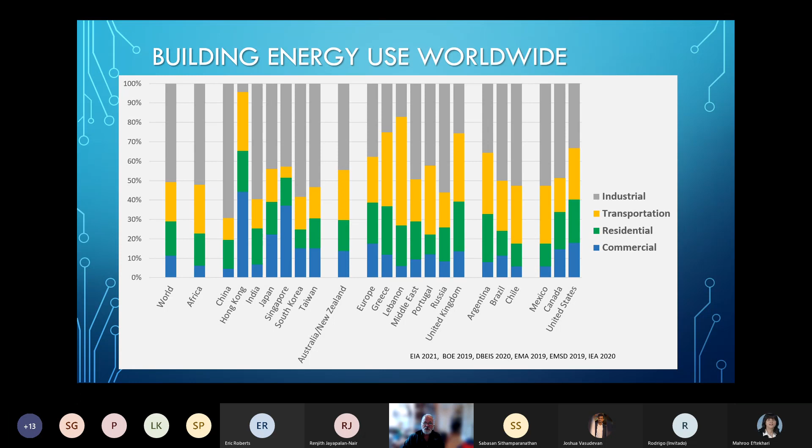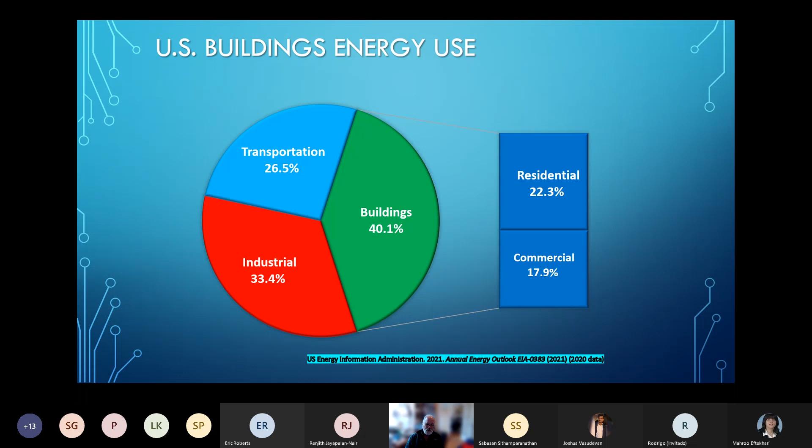If you go to the center, the last bar in the center where Europe is, the UK, it's about 40%. It's actually very similar to the US in terms of energy use. Transportation's a bit higher in the UK, with about 25% left in industrial. But I'm going to focus my next couple slides on the US because I have good data about end uses. I try to present that where I can. So for the US, we're at 40%, a little more than half in our residences. Up till about 10 years ago, it looked like the commercial sector, the non-residential sector, was going to overtake and be the strongest sector, but it really hasn't recovered from the economic downturn of a decade, 12 years ago.

Oops, sorry. But if we look at residential, and this is really kind of the important part of it, we have to look at it as a whole. Our residences, we used to think of them as primarily energy used for heating, water heating, probably less so cooling in the UK, but then our appliances and maybe even the computers and some of the other things going on. But if you look at the bottom bar, at least in the US, we're seeing that a full quarter of energy uses are small energy uses. These are things like the cell phones and all the devices that are connected.

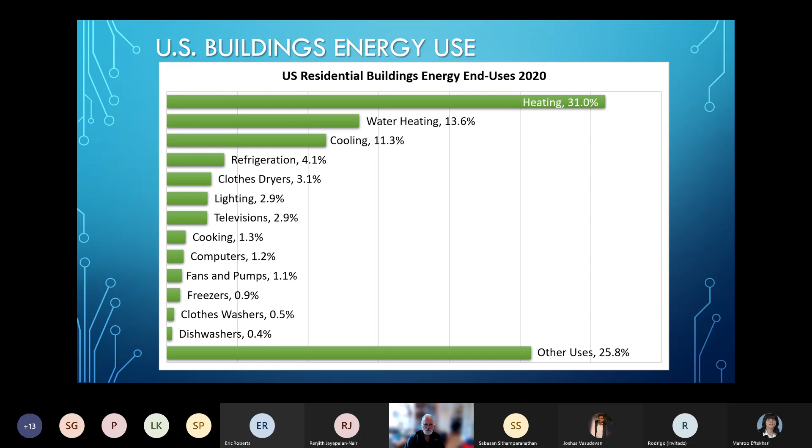In my own house, I have 22-year-old twins, which are away at university right now. But when they're home, we can see 19 or 20 devices connected to the Wi-Fi system. So they're small pieces, but they're also very important. And they add up to be quite a lot of energy use. So we have to not just worry about the main parts there, the heating sector or some of the appliances and other things. We have to worry about all of it in total. And similarly, in the commercial sector, there is really not a single building type. This is averaged across all the building sector.

Apologies, I've got allergies already.

So for example, if we had a grocery store or supermarket, refrigeration would be probably 50% of the energy use, and cooling and lighting secondary results there. If it's an office building, probably a combination of heating, cooling, lighting, ventilation, and equipment. And so we need to look at the combination of all of those pieces.

And again, other uses, this is beginning to include things like all our interior transportation, our lifts, escalators, moving sidewalks, all the other things in addition to that that you're not seeing there. They're small uses. We have to cover the whole sector and look at all the uses if we're going to really make inroads into improving the efficiency.

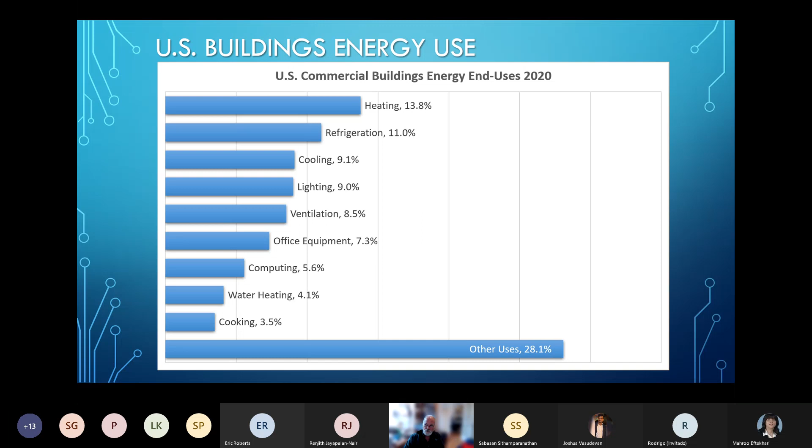In the US, ASHRAE standards work in the energy area began 35 years ago, or actually 55 years ago, sorry. 45, I'll get the number right here in a second. 1975, ASHRAE published the first energy efficiency standard for buildings, 90-75, and had progressively been improving that. And you see the latest version of that published in 2019. There'll be a new version this year as well.

They update every 3 years, but the changes in the percentage of drop for that have been slowly getting down to where they're a few percent, maybe 6 or 7. And I think the preliminary number shown there for 2019 actually decreased to about 3.5% reduction. But at this point, our buildings are already using 70% less energy than would have been allowed under the standards of the previous century.

The green building standard from ASHRAE 189 has already been working as well. They tend to be a bit ahead of 90.1, partly because they're based on 90.1, and then they are updated kind of out of sequence. So they're a bit more, so that we're seeing down in the 75% or more range.

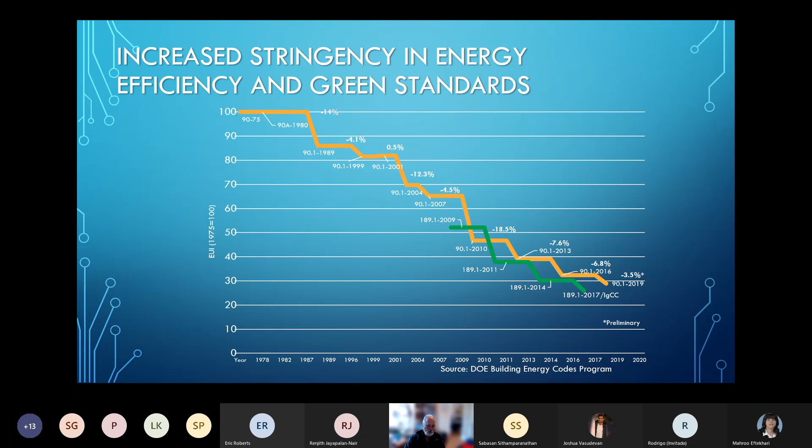And so that's continuing to get there, but also we're all seeing a point at which there's not much else that can be done from a code standpoint to reduce the energy use in buildings. It's got to be an integrated approach, not just a prescriptive.

So let's talk a little bit about modeling and simulation. And for many of you, this is not going to be new. I'm just trying to lay the groundwork here. So a definition from the dictionary: a model is a schematic description of a system and can be used for further study. So when we're talking about modeling in an energy situation, that's what we're doing. It is a derived description of what's going on there for further use.

If we're doing simulation, that's specifically mathematical, so that you're creating that model and then using the variables to determine the effects on other variables. So we create a model of a building, and we're going to simulate how it reacts to changes in environment or changes in technology, or maybe some of the building systems related to it.

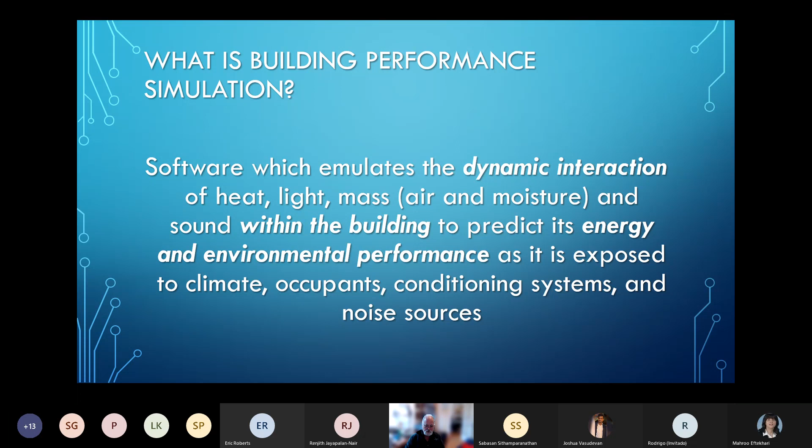So what do we mean by building simulation? Specifically, we're talking about software, and we're talking about dynamic interaction of heat, light, mass, and sound within a building. And we're trying to predict what's going on with its energy and environmental performance, as it relates to changes in climate, occupants, systems, and even now noise sources, because we're not talking strictly about the building energy here. It does go beyond that.

So building performance simulation, in my opinion, is still much more art than science. The science is pretty well established in terms of the simulation tools themselves. The art is in understanding and knowing what the information is that you need to be presenting, what information is important, what the level of detail is, and how that should be put together. And what do you do when you don't have the information? So that's really kind of the art part of it.

Issues related to maintaining the building in a model, the data throughout the life cycle. We need to be training users to think about simulation methods and different ways of attacking a problem, not the tools themselves. Yes, you need to understand how tools are, but I think we spend too much time worrying about particular tools and how we can trick those tools or do a workaround. And that's not a useful way of looking at it. There are other more accurate ways of trying to do that.

And anytime you try to trick a tool, you're depending on your understanding of what goes on in the tool to know whether it's going to work or not. And that's kind of risky. Our tools also tend to get behind. New technologies come, and it's difficult in many tools to be able to model those quickly unless the developers are staying up to date. And if we can't simulate a technology or system, it becomes a real challenge.

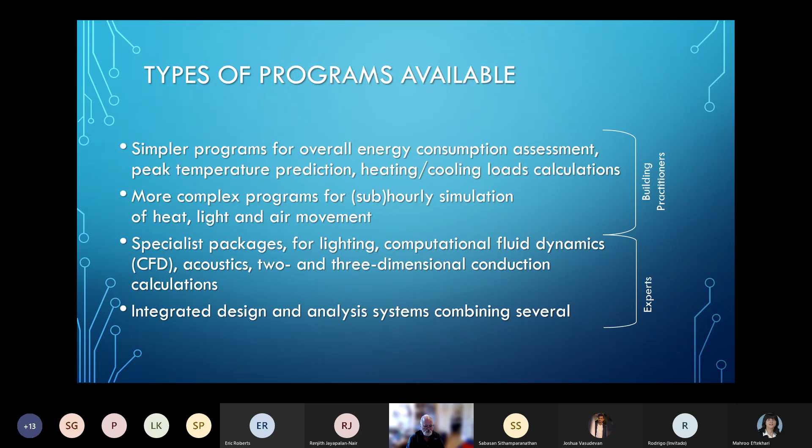So why do we bother using simulation? Well, it allows us to make decisions, to understand the impacts of actions we may take throughout design into construction and even into operation. It also lets us say, if we do a simulation and find that heating is the biggest issue, then we can focus there first and focus the efforts where they make the most effective use of resources. It allows us to look at alternatives throughout the building design process, even into construction, operation and retrofit. So is this window better than that window, or should I insulate?

But what about efficiency of heating and cooling equipment? Where can I make changes there? Simulation also allows you to do prediction of performance against benchmarks or project goals. So you want to set a goal to get to 50% below the energy standards, and you need to be looking at that early to attack the opportunities for that, and be able to challenge

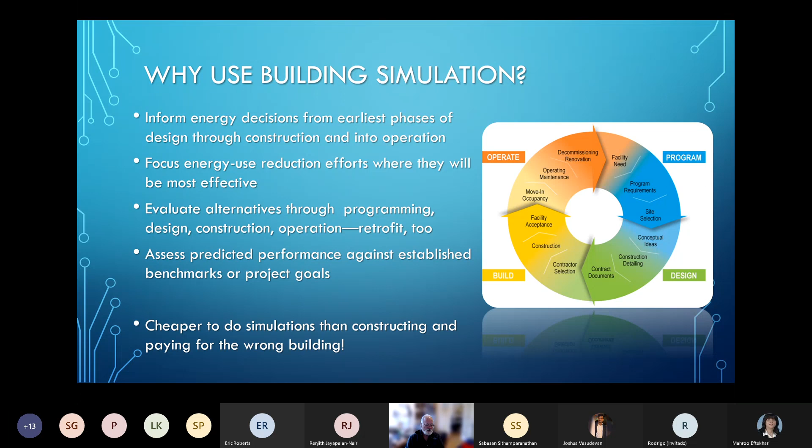things that are not helping you get there. And frankly, it's cheaper than constructing the wrong building. It's cheaper to do simulations than constructing and paying for the wrong building. That energy impact may be for 30, 40, 50 years. So you need to recognize that 1 year or less of cost to do an energy simulation is going to pay back many times over throughout its life.

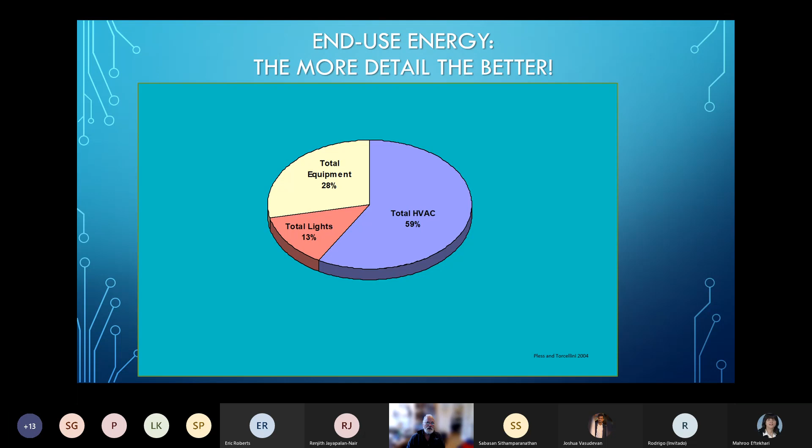So this is an example from a building I worked on when I was at Department of Energy. This was an early attempt at doing a very low energy building. They didn't get to zero initially, they have since. But this typical pie chart: HVAC at 59%, lights at 13 - oh, that looks pretty good - and then internal equipment at 28. But I need to look at the details of that. I need to understand what's going on.

So if we start from the top right with the electric boiler - they designed heat pumps. Why is the electric boiler taking almost 25% of the energy? What they found was that the sequence was backwards of what it should have been, that the heat pump should come on and the electric boiler was only supposed to come on when the heat pumps could not meet the load. This led to them not meeting their energy cost savings goals, because the electric rate was set by the highest peak in any of the previous 11 months. So that was a real problem. It could have saved them a lot more money.

Also, wastewater treatment - unusual building, it has its own living system, basically plants and other biologicals helping to clean the wastewater as it comes out of the building. The wastewater is cleaner, but it has a 10% impact here. And although we don't really think about it in many of our buildings because we don't treat our own wastewater, we don't count the pumping to get water into our buildings - it's about 10% of the energy use of most buildings at the municipal level. So it's still a large amount of energy going on. So water efficiency is also important.

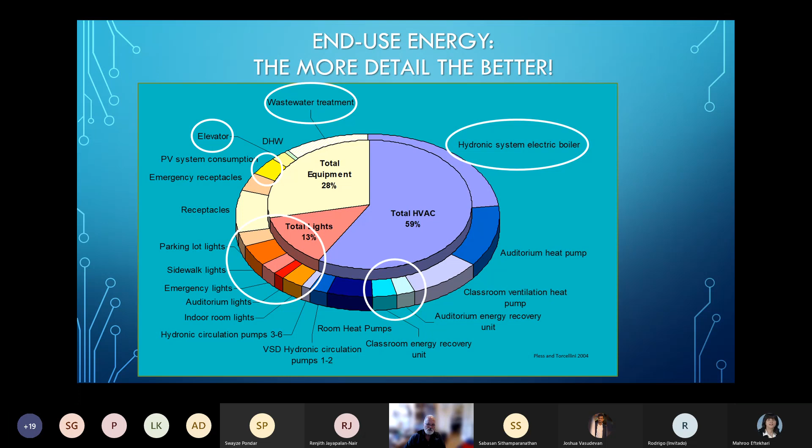So we need to look at the detail. The more we understand about how energy is used, the more we can find ways to cut this even further. And this is that building I was just talking about with the pie chart. So throughout this, finding that simulation is kind of a critical tool

to support building design and operation. It helps you make those decisions we've been talking about and selecting the best combinations. But simulations are just that - real buildings will use more energy, they'll produce less power if there's PV. Controls don't work as they do in simulations. They're ideal in simulation, and that's not how they work in reality.

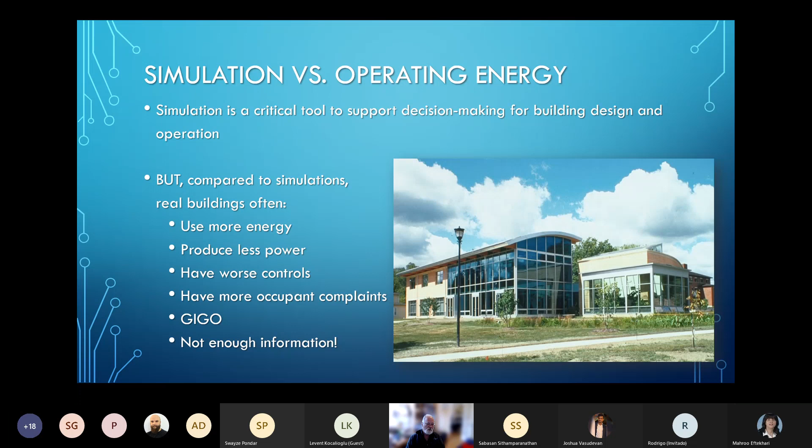Occupants can't complain very loudly if you're in a simulation. Just a few hours uncomfortable doesn't say anything, but a real person will. And it comes down to garbage in, garbage out. The less we know about how the building's operated, the less likely we're going to be able to predict it.

This is a great quote, not specifically about building performance, but from Stewart Brand, who has a great book. This is from 20 years ago, How Buildings Learn and What Happens After They're Built. And what I love is his quote that every building is a forecast, and every forecast is wrong. And he's right. What we're forecasting their use is just not going to happen.

And the best example of that is on the cover of the book. These are two buildings built in New Orleans in 1857. So kind of traditional, what would have been Federalist style here in the US at that time. Pretty simple, and they're effectively twins. But here's what they look like 150 years later.

You can't even hardly tell that they're the same building. The one on the left's got some of the New Orleans wrought iron added. The one on the right's got more traditional balcony and other aspects added to it. So it is a very different sort of look.

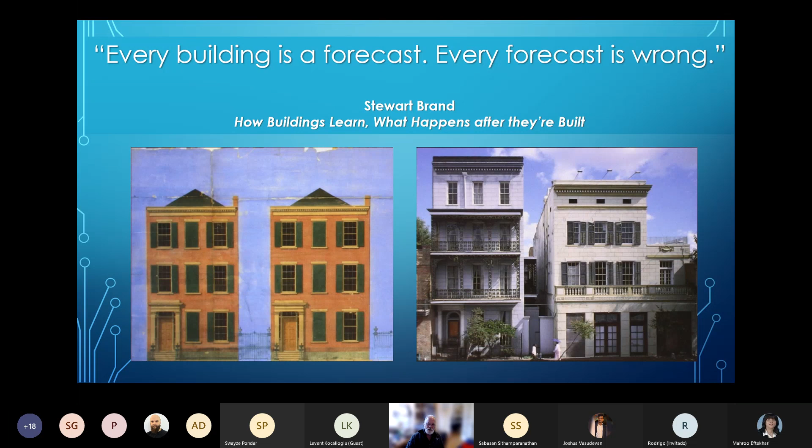And our buildings start evolving immediately when we start using them, because they don't quite meet what we need, and they're not what we're doing. So our prediction is not going to be what happens in reality.

So let's talk about what's inside the black box. The ASHRAE 2021 Fundamentals Handbook is probably the best source of good information about that. Chapter 19 has information about all the energy estimating and modeling methods. Some of my presentations derive from that, but also from other things as well.

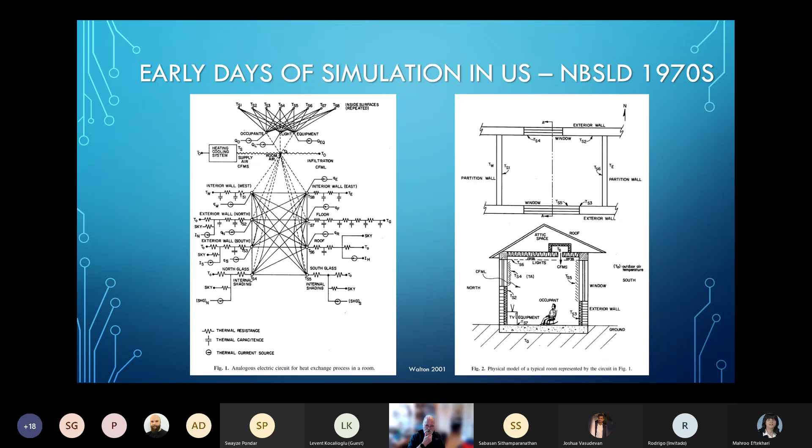Early days of simulation, there was a program, a heat balance program, NBSLD for National Bureau of Standards loads, and they were almost treating the interconnections of heat flows like an electrical circuit. So you'd have resistance through insulation, etc., and so they were being able to do that there. This is from a summary that the author of that created 20 years ago, George Walton.

There's a history that's also been done in several papers, many of the foundational algorithms from the 20s through the 1950s, and then beginning to use computers in the 60s. ASHRAE started with a task group on energy resources, which are really looking at how the calculation methods are.

1971, the U.S. Postal Service or Post Office created a simulation program using some of that information, but they went down a path of what's called weighting factors, and we'll talk a little bit more about that. That path led on to a program from NASA. NASA had an energy program. Also, then that was then repackaged for California and ERDA, and ERDA was a predecessor to the Department of Energy. And that is the series that then became DOE2.

The other method, the National Bureau of Standards I just talked about, the NBSLD, that led to a series of other programs that were focused more on a heat balance method rather than weighting factors. And we'll talk a little bit more about some of those changes.

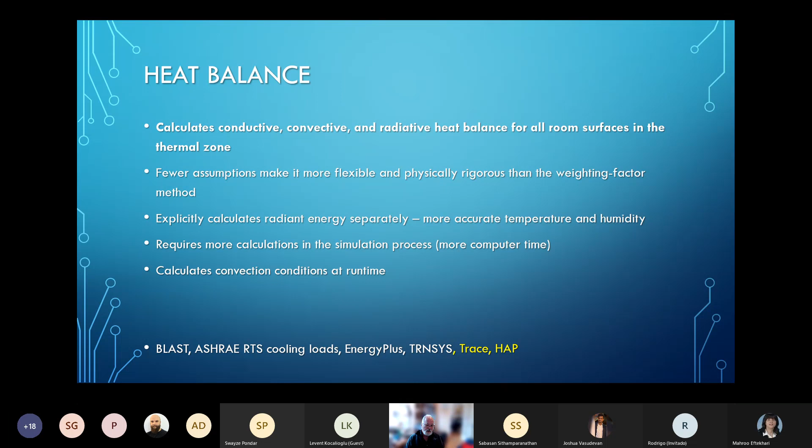The other thing is the convective coefficients can be calculated at runtime rather than pre-calculated, which makes airflows around surfaces more accurate as well. So we've got BLAST, the ASHRAE radiant time series cooling loads, EnergyPlus, TRNSYS, and now TRACE 3D, and HAP has a new program underway as well.

Thermal network, explicit network really, you have to have a matrix to describe all the heat and energy flows. So you are explicitly describing what's going on. There are no assumptions. It's flexible, physically rigorous, but it requires much more explicit input describing exactly what you're trying to do. It can require more calculations because there are iterations that have to happen, but it's often a good trade-off if you're trying to be very accurate. So ESP-r and IDA-ICE are two examples of that.

Other differences, if you look at the DOE-2 family versus the EnergyPlus family, they're kind of separate. In DOE-2.1e, for example, you would calculate all the loads for the entire year, the 8760 hours. They would then get passed to a system analysis, which would pass the system loads onto the plant. There was no feedback, and that led to loads not met, if you're familiar with that in either DOE-2 or EQuest. EQuest did a bit more merger of that with the loads and analysis—there was some feedback, but there's still some sort of limit on that as well.

In EnergyPlus, there's feedback at the time step, which means where loads can't be met at the system or plant level, you will see those reflected in rising temperatures if you're cooling, or humidity changes, or other things directly within the simulation.

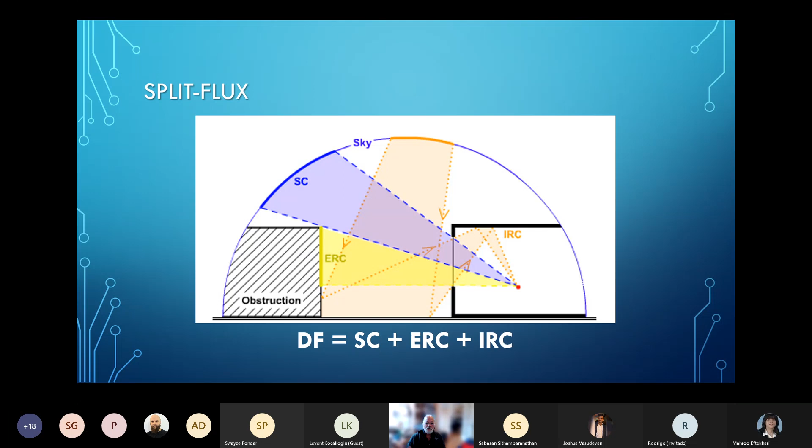So you've got the sky component, the externally reflected, and the internally reflected, and those together are what you see at a single point.

Radiosity calculates radiation transfer among surfaces. Now we're talking about light transfer. It's very similar to a heat balance, and it's accurate for most configurations and structures. You can combine it with Split Flux to increase the accuracy of those calculations.

It'll create view-based images, but they're not photorealistic. They're pretty flat looking, as we'll see. It also does not account for light contributions from transparent, translucent, or specular surfaces. So DLux, DElight—there's a version of that in Energy Plus, and also AGI 32.

That's what a radiosity image looks like. You can see the shadows, and it looks pretty accurate, but it's not photorealistic. It's a pretty flat image in terms of that—there's no spark to it because it can't do the specular reflection we'll talk about next.

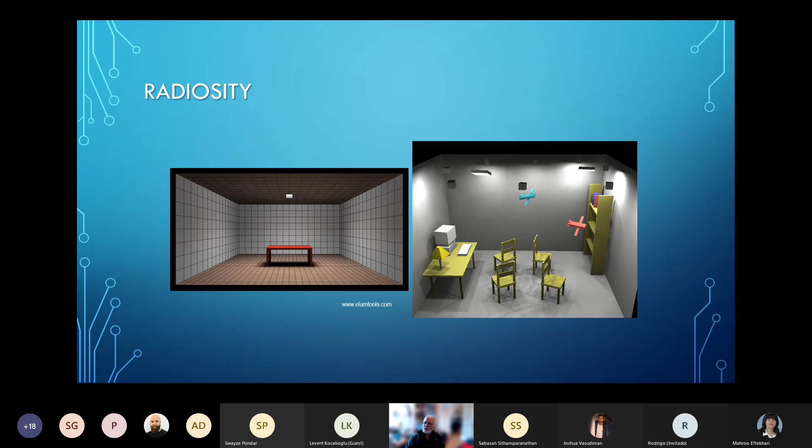Ray tracing is the most accurate, point-specific lighting calculation you can do. It follows a given reflection of rays outward to light sources in the scene, basically tracing where the light or reflections are coming from. It's very accurate, you can put pretty complex systems together, and it creates very photorealistic images—I've got a couple examples. But it can be slow depending on what you're trying to do.

I know ESP-r has implemented a version of this, and Energy Plus in some of the tools now can do that as well. So Radiance, which is a public domain program—Spot, DaySim, Diva—most of them all derive from Radiance as an engine, but provide useful interfaces.

Ray tracing—just take a quick look here. There's a camera, and it creates an image based on where the rays are coming from around that particular object.

These are radiance images, produced with simulation based on inputs, so you can have a lot of accuracy, and it can feel more like some of the renderings you see out of the BIM tools today. But in this case, it's photorealistic and photometrically realistic, which is useful.

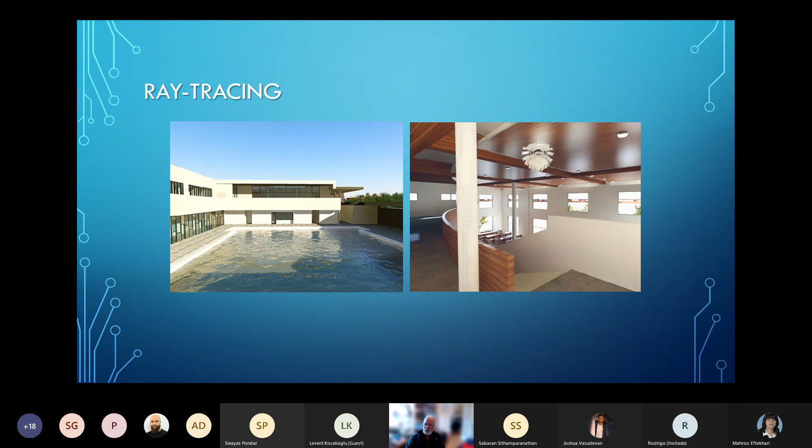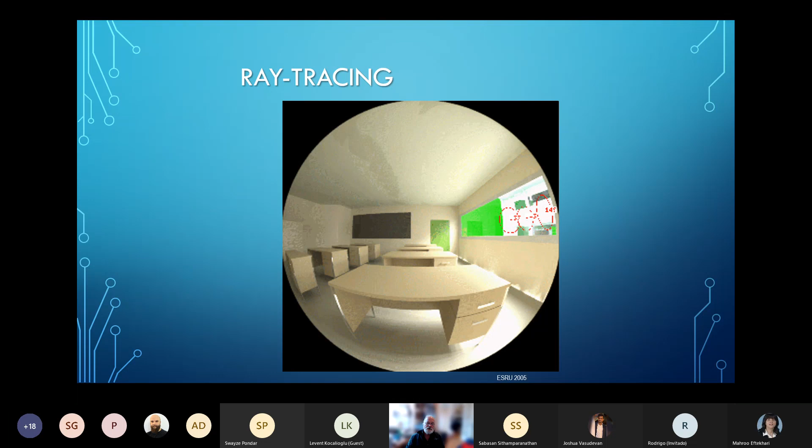This is from ESP-r, being able to actually measure light levels coming into a space, seeing glare problems. They use a fisheye view to look at a whole room, seeing how changes to different technologies can help improve that glare problem.

So many tools—where do we start? Well, the ASHRAE handbook is actually a pretty good starting point. It does not talk about tools specifically—that's not ASHRAE's thing—but it's good if you're trying to understand the basics of the methods. I haven't covered some of the statistical methods and deep learning and AI-based things, but it does cover those as well.

There's also a book that came out of IBPSA, Building Performance Simulation for Design and Operation, updated just a couple of years ago, that has chapters on a wide range of things. There was also a report that we did about 15 years ago that had 20 different programs and tried to, in a very quick brush view, look at what the combinations of capabilities were across the various tools. 20 different tools were covered there.

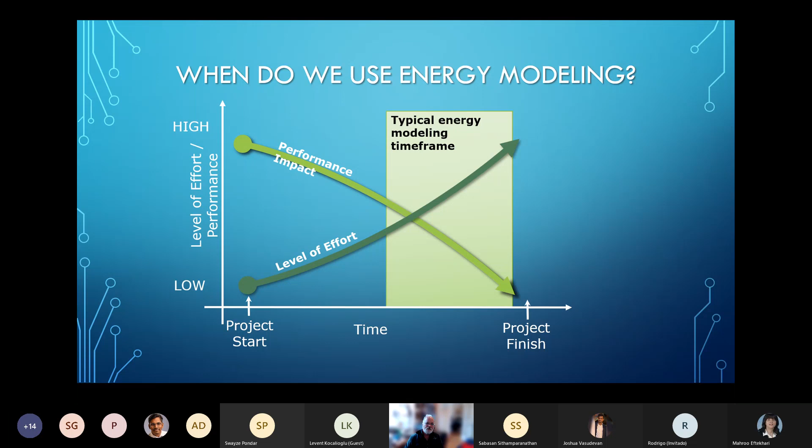So what the standard does is put a series of simulation cases together, minimum requirements for doing that, and then describes that. It's not required for all buildings, although it is cited in 90.1 and 189 at this point. It's about using simulation during design. It's focused on people that are trying to either contract for or are interested in using different simulation methods.

So the compliance is pretty simple. You have to do a climate and site analysis. You have to do benchmarking: what do other buildings of this building type in this location use in terms of energy? There needs to be a charrette focused on setting goals, and those goals need to be part of the owner's program or requirements. Then there's some general modeling cycle requirements, and you have to do one set of models, and that's all it takes to comply at this point.

There are different levels, and we're looking at it saying, if you're trying to do more detail, what those involve. But there are also these different cycles: simple box, conceptual, HVAC, design refinement, integration, or value engineering. And that's one of those things you have to do.

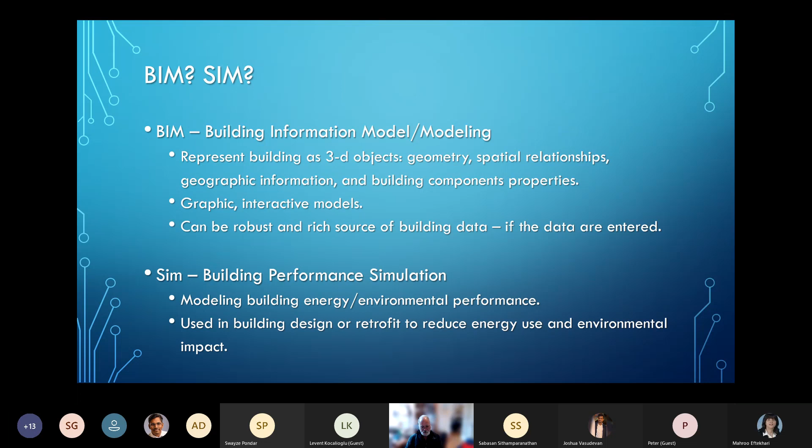So what about creating a simulation model from BIM? I said earlier it was kind of difficult. BIM, we all know what BIM is, trying to represent a 3D representation including geometry and spatial relationships and how things fit together, as well as their components. Often very graphical, interactive. And then SIM, we've been talking about, is really looking at how do we take the information, the geometry and all that other part, and use it to get the building performance.

So from the modeling standpoint, the model and the modeling are kind of involved, but using the software to really look at the attributes of the building and how it goes together. And BIM is widely used at this point. I don't think it's widely well used, but I think that's a work in progress today. So the idea is to be able to have and share that information.

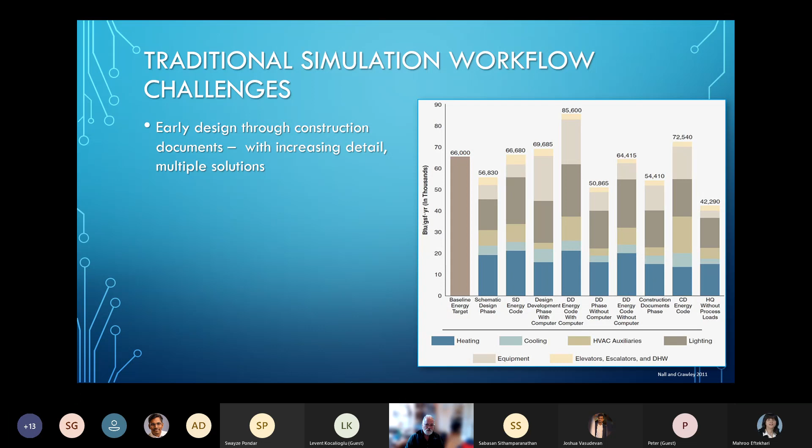So here's an example of a project I worked on many years ago. This is a corporate headquarters, and you see the bars are changing. And that's partly because information was changing. So working on this project, we started in early design before there was even an initial design, through construction documents. With increasing details, we had to go back and revisit. We often had to throw the models out.

And then we get on to construction documents. Now we have fully developed things. We have a cafeteria, we have an auditorium, other things, and the atrium is now quite a central part of the building. But at the same time, if you look at my chart, it's showing the energy code and then the design development energy code with the computer and without the computer, showing the various components there. And fortunately, because we were monitoring throughout design, we were still able to do it. But essentially, I had to reconstruct the geometry for this project every time we were dealing with it.

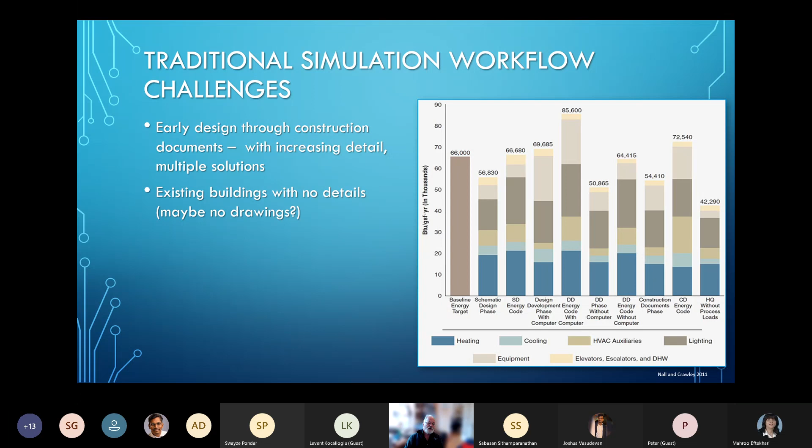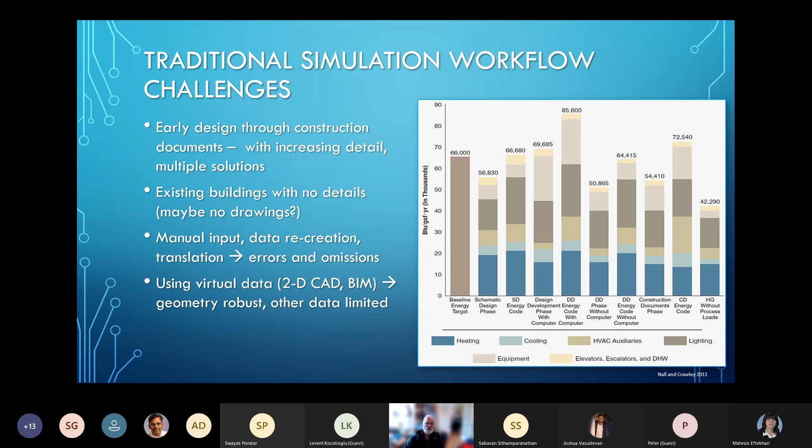If it's an existing building, how are you going to put that together? No details, probably no drawings. So anytime you have to do manual input, you're going to have errors and omissions. If you've got the virtual data, and I personally prefer 2D CAD or even just floor plans to BIM at this point, because I spent so much time cleaning up the BIM model. You probably have very robust geometry, but you may not have thermal-physical properties. They may be there, there may be space for them in the BIM, but I don't see them very often.

So a 2D workflow might have a drawing, and we have to create that in there, create an energy model and do analysis results. That's pretty good to work from. It's often not as fast as some others.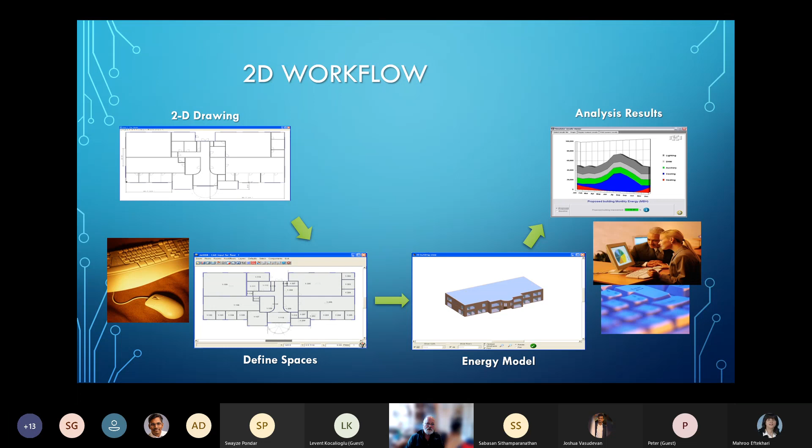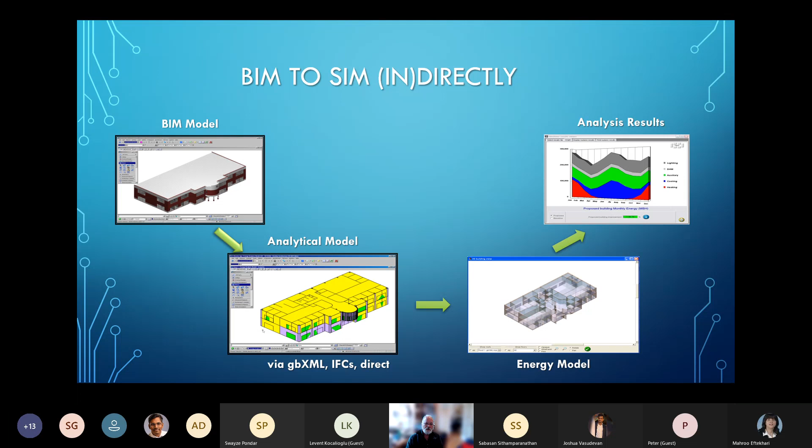What if we could take the BIM model through an analytical model, and there are various methods of getting there, and then on to energy. If that's more seamless, that is going to speed up the process quite significantly. The analytical model solves some of the issues of the BIM, makes sure spaces are enclosed. A lot of BIM models don't have floors in them, which I find interesting, but also just creating all the spaces, getting them closed and making sure the boundaries are there.

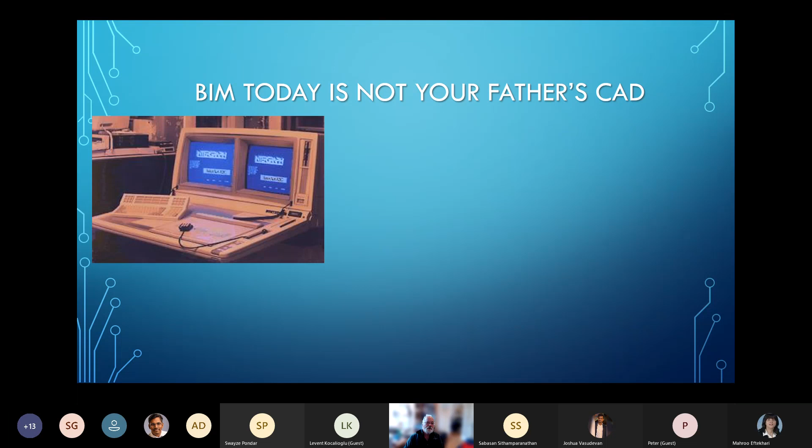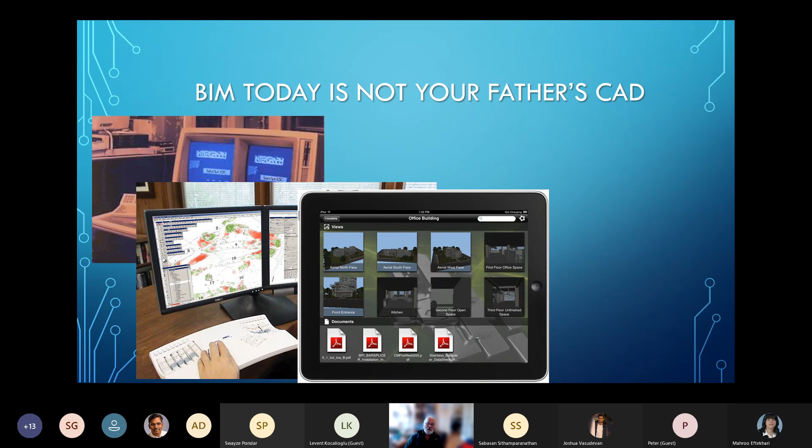But it doesn't have to stay in the office. It can now be on our tablets, being able to take various views and look at that in the field, even to see what should be, for example, up in the ceiling, and being able to compare that in the field.

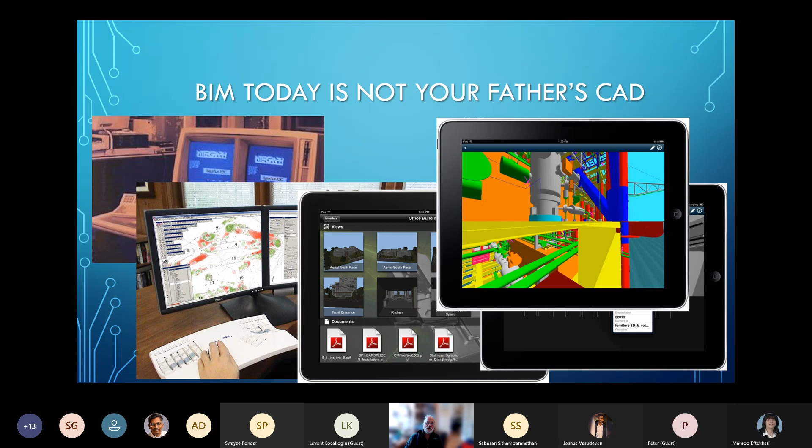So BIM to Sim: buildingSMART has been in this for a while with the Industry Foundation Classes. Most BIM software will do at least geometry. Some of them will take it further. It's been around for 20 years, still pretty complex to deal with, but it is limited in what they can do. gbXML, another independent format, is focused more on the energy side of things rather than the BIM side, being able to translate.

Autodesk bought a product called Green Building Studio. Most of that has been pulled into their products, particularly Revit today. But then Autodesk, Bentley, and Graphisoft all have built-in simulation capabilities now. At least on the conceptual level, you can begin to look at that. And I really still believe interoperability is key to getting this done. It's just very difficult to do.

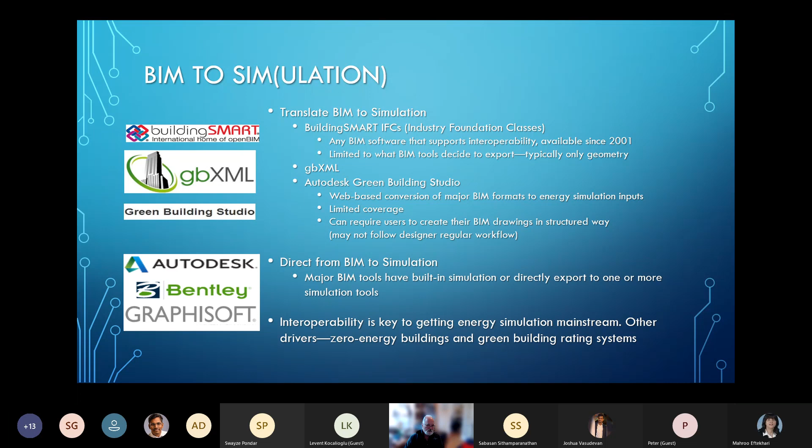I've seen some very elegant solutions where it went very cleanly, but that's because somebody spent some time in the BIM model to try to solve some of the issues they knew would come up if they took it forward just as it came from the design team. So it's kind of a challenge still today. But there are ways of doing it that are very quick.

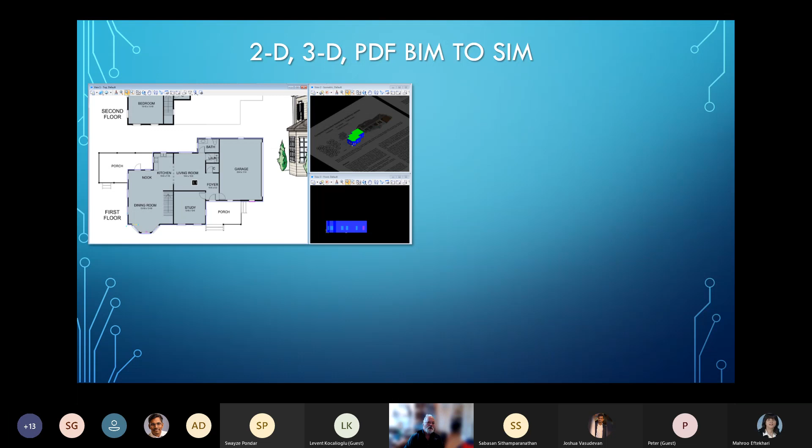This is a paper I found while doing a scan on floor plans. It was from master's students at Stanford, and they were looking at trying to auto-create floor plans based on relationships and how houses should be configured. So this has a floor plan there, but it's a PDF, and fortunately it has dimensions on it, because otherwise I wouldn't have been able to do it, because PDFs have no scale. But in this program, I was able to trace out the building in about 10 minutes, including all its windows, to get at least the first floor set up.

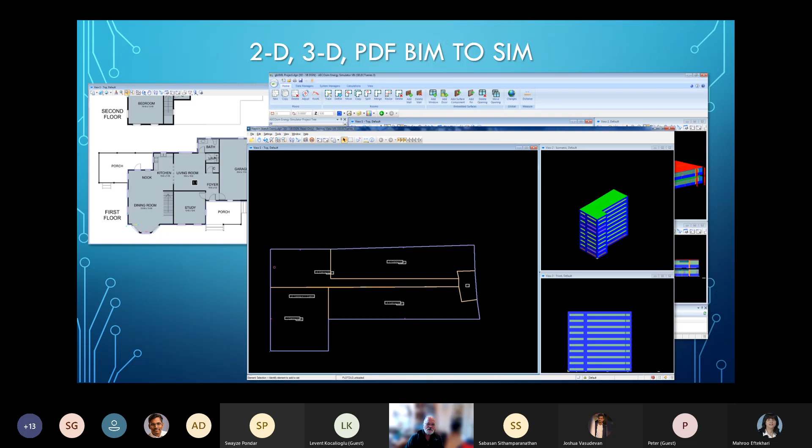Intentionally didn't straighten it out just to show definite. So some of the challenges: existing buildings mean no model drawings. So we're going to be doing takeoffs, we're going to be doing measurements, and probably going to make some errors. It always happens. And all this time in collecting the data, that's not really what our focus is. We're trying to use our tools to evaluate alternatives.

So there are several technologies, not so new in many cases, but new to the building sector. LiDAR has been out there for a while, but it's the idea you put a device in the center of a room and it sends out a ray of light and measures the reflection back and creates a very accurate model. Can be time consuming. There's some interesting handheld versions of that today.

Photogrammetry has been around for decades. It essentially uses automated triangulation off photographs to mathematically create a 3D mesh. The more accurate your photos and how far they overlap, the better you're going to do. It works well with aerial surveys, working with a number of projects right now in Dublin and Ahmedabad and in Lithuania, where we're working with the cases to be able to create this.

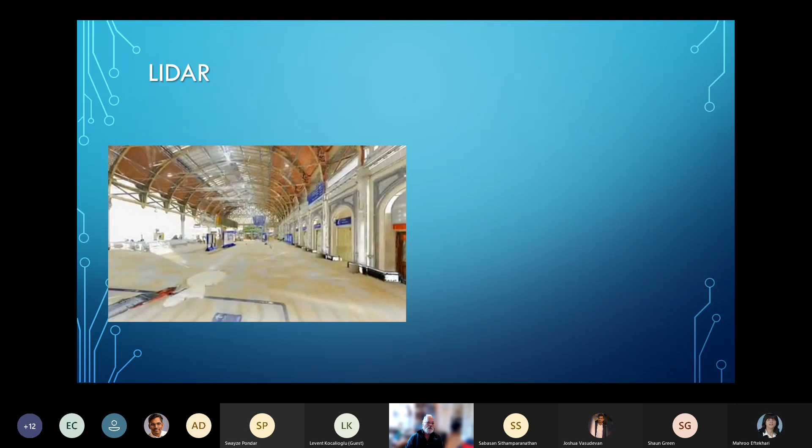This is King's Cross, I believe. This is a LiDAR image of it. This was when I guess the Elizabeth line was going in. This was 10 years ago. They were trying to get an accurate model because they had no idea where everything was and everything was having to interact. But platform 9 3/4 being there. But you can see the accuracy of that when you go forward. You can begin to even read signs because of the light reflection. So you can measure very accurately from this information that's provided.

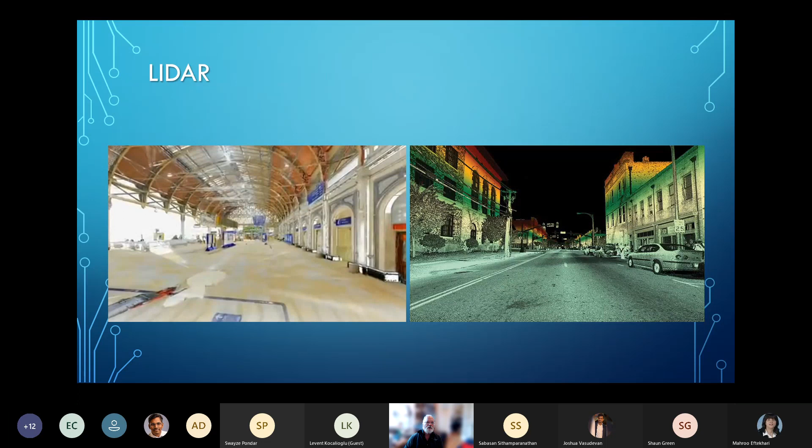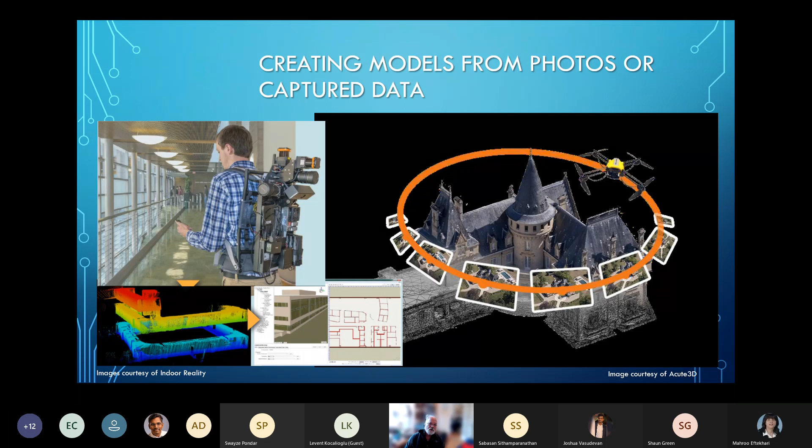I've also seen there's an indoor reality group that had a walking backpack, and those orange, yellow, and blue lines were the information they were collecting as they were walking through. They did a comparison of doing a field study by hand or doing this, and in less than a day they collected information in a 6,000 square meter building, and it would have taken a month for consultants. They did a comparison to show that.

So can I get a model? IFCs, gbXML are quick ways of doing that. If you need more detail, LiDAR can do that. Photogrammetry can really provide a lot more on that. Even smartphones today are able to use that. And then you can bring that data in to the analysis tools.

So, summary. For solution methods, what's inside that black box is probably as important as anything you do with it. Then the interface of the results. Understanding the underlying methodologies is really important so you can understand their limitations. Simpler ones are going to be limited. You're trying to do complex work, but sometimes a spreadsheet is good enough. Getting the data from these 3D models is becoming easier, but it does take some skill in trying to understand how that data gets translated into something else.

The other problem I see is that some tools do a direct conversion and they give you a model, but you don't know what the defaults are in there, and that can take much time to deal with. It also comes down to: how good my simulation results are depends entirely on how good the input is. So back to garbage in, garbage out.

The more you have about the building and how it operates, the more you can expect your results to reflect reality. All these tools are powerful. They allow you to compare different systems, even contrast how they operate and their controls and everything else, throughout the life cycle. So they are a really powerful way of looking at buildings.

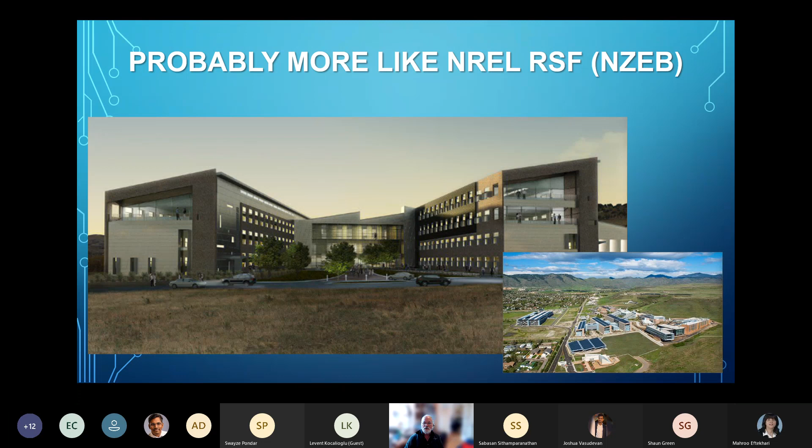So probably we're going to see more like what we see at NREL, the National Renewable Energy Lab, a whole campus of buildings looking to go towards zero energy. They don't look that different from what we see today. I mean, it's buildings, we just have some additional PV related to it and how they interact with the site.

If we don't talk about water - water is becoming a major issue. There are places in the US, on the West Coast, where they will probably not allow new construction because there's not a water source to supply that. Indoor environmental quality - we want our buildings to be healthy, but if we're not measuring and understanding that, we're likely to have issues. Carbon decarbonization is becoming an issue too.